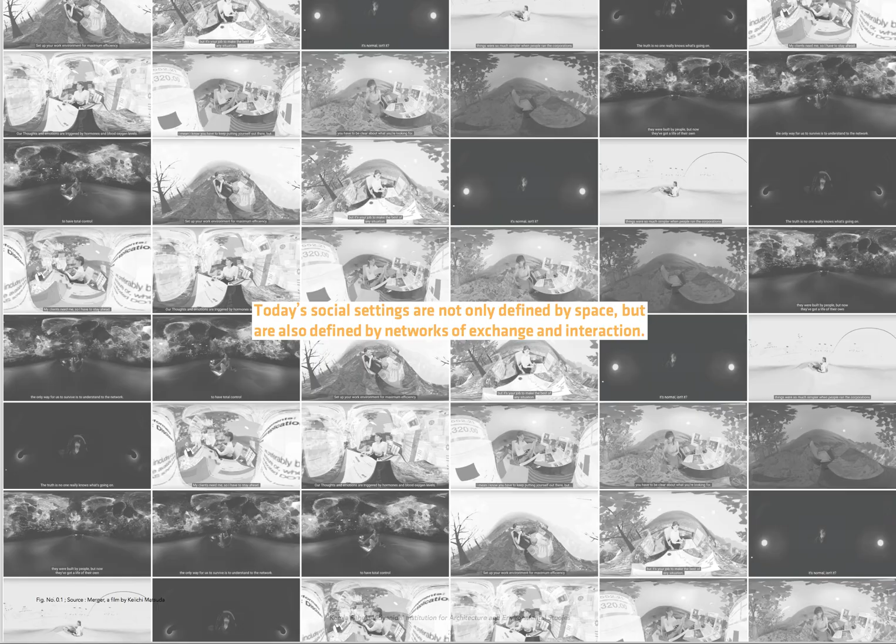Today's social settings are not only defined by space but also by networks of exchange and interaction. We are witnessing the rise of a new type of infrastructure in the city, one that is not human centric, but belongs to the machines.

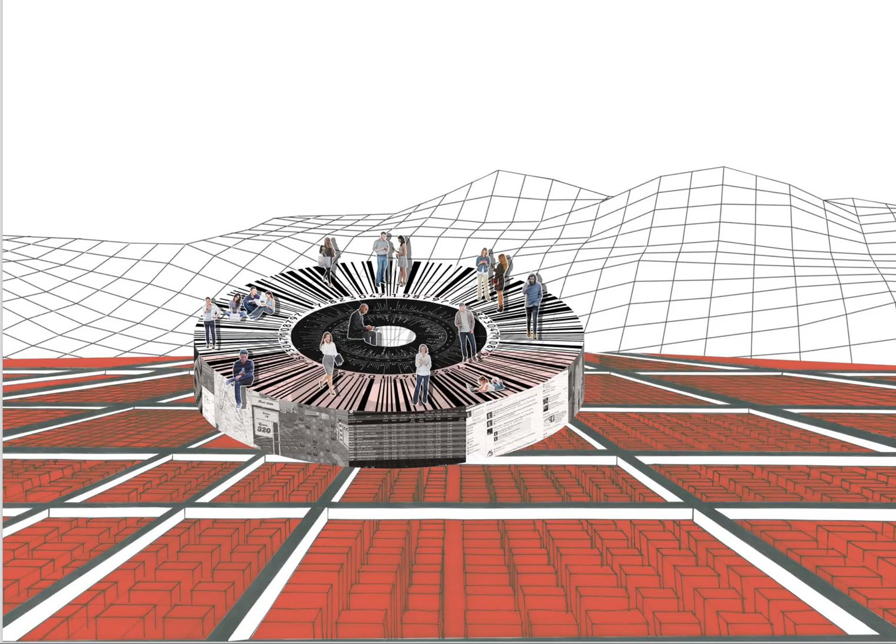The public domain 2.0. The public domain online neither has a fixed identity nor is limited to physical proximity. The digital domain has emerged not merely as a means of transmitting information, but as a major new theatre for public activities at levels ranging from local to global. Communities are migrating from physical spaces to spaces of digital networking, and since the arrival of social media, the relevance of physical public space is questioned.

Machine landscapes. Digital technology has been neutralizing place and materiality. However, big data management itself also requires a physical infrastructure and an architecture. Every digital platform requires a physical establishment to exist. It is an atlas of sites, architecture, and infrastructures that are not built for us, but whose form, materiality, and purpose is configured to anticipate the patterns of machine vision and habitation rather than our own.

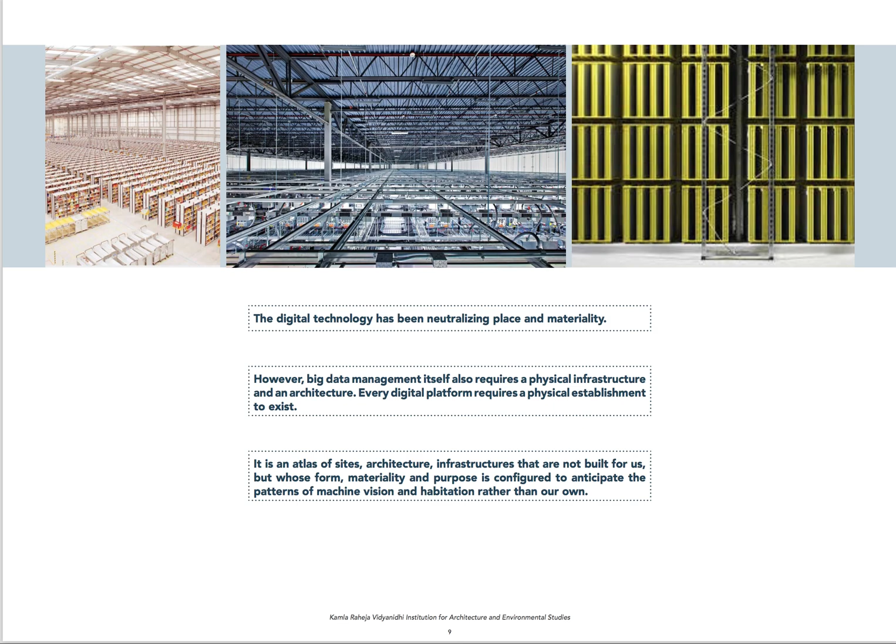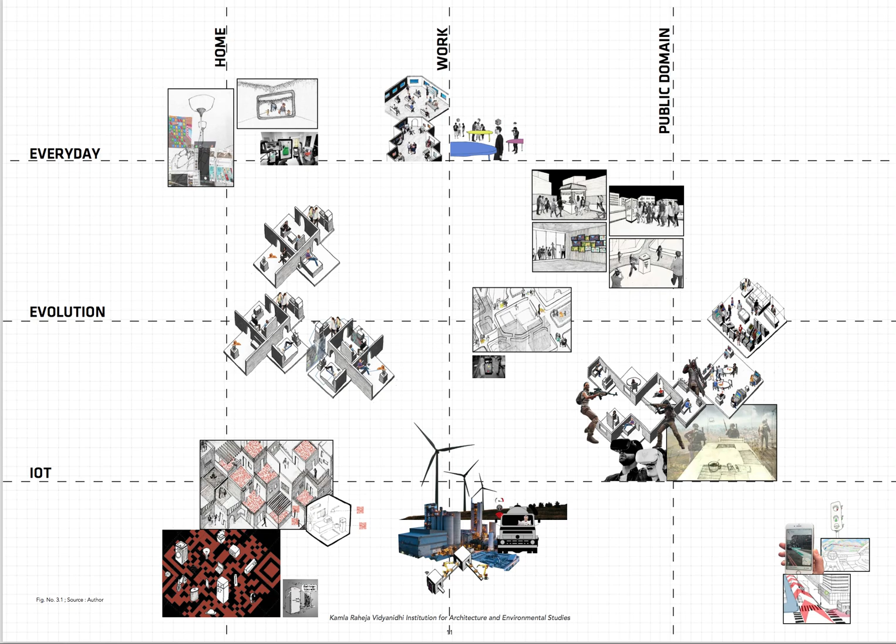Digital space and physical space. Architecture, technology, and the market continuously evolve and shape the way in which we live, sometimes challenging traditional ways of life. In the domestic realm, the arrival of electronic space is changing the social settings of a household. Similarly, employees working together remotely from around the world is becoming the norm. The space we live in expands and is inescapably fragmented, while a new infrastructure connects the pieces.

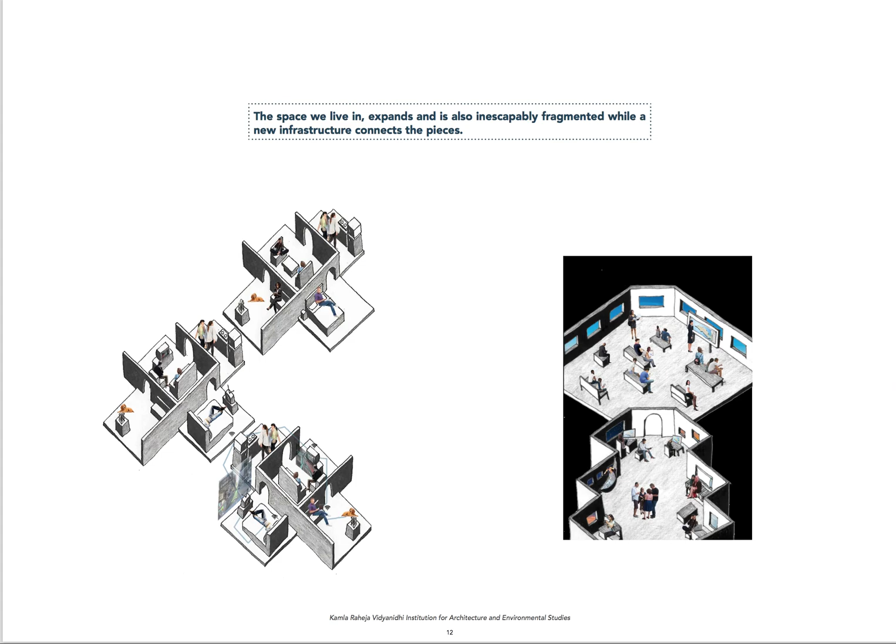Klaus Schwab defines the phenomenon of digital revolution as a fusion of technologies that blurs the lines between the physical, digital, and biological spheres.

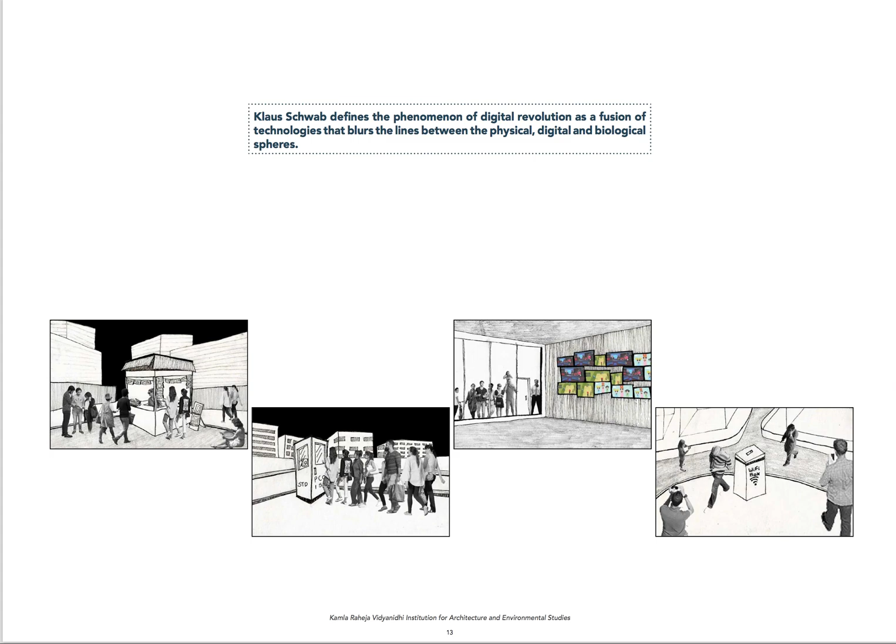Digital urbanism is a phenomenon external to architecture which is harnessed as a means of transforming it. In the era of the post-Anthropocene, the structure of existing human centric programs is changing. Public buildings are changing their roles, yet there is no imagination for a new typology for these buildings. Technology brings forth new products and services while making existing products obsolete and outdated due to the emergence of faster communication.

Digital narratives. The city of Mumbai has been working on a set of existing functions while new functions are also being added to it. The BMC has been concentrating on the segment that deals with citizen oriented online services to trigger off the first phase of its digital implementation. The basic role of providing administration and governance to the city is played by the Brihan Mumbai Municipal Corporation, or the BMC. Its administration is spread over 6 zones and 25 wards in Mumbai.

Mumbai's free information kiosks give access to email, e-banking, e-greetings, forecasts, exam results, railway inquiry, Mumbai Guide, movies, restaurants, news, health, education, and more. One can also get information about taxes, bus routes, rail routes, and fares. These kiosks are located at various junctions within the city.

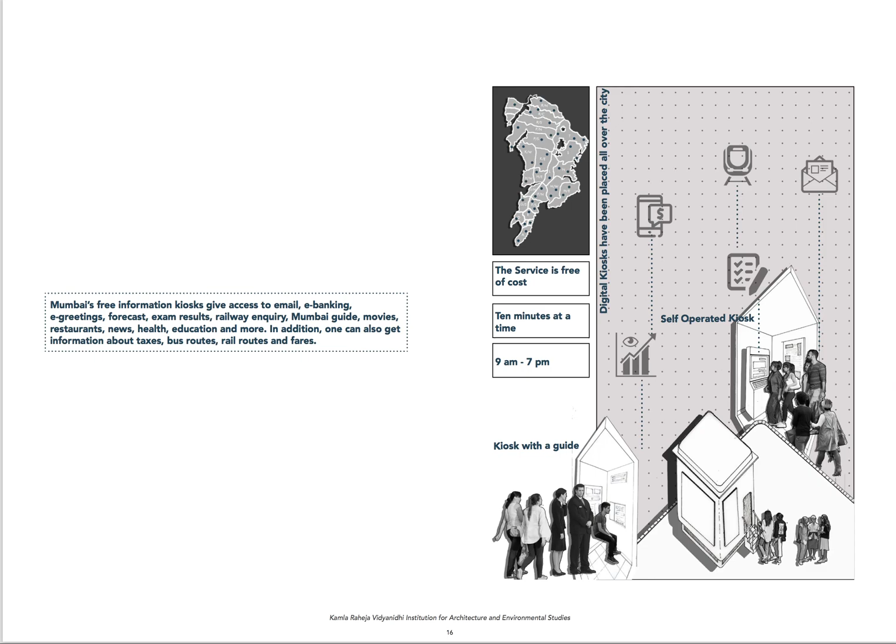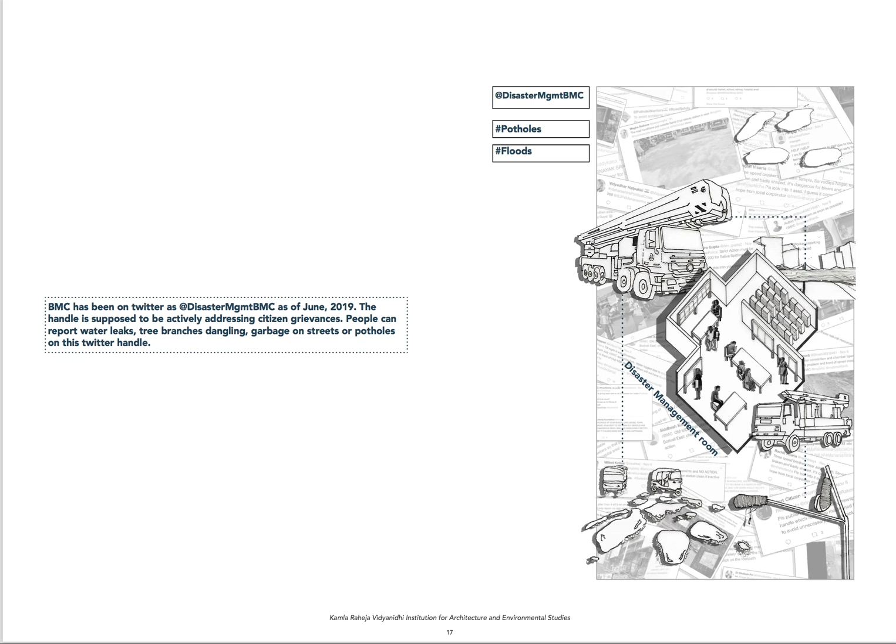The BMC has been on Twitter as @disastermgmtbmc as of June 2019. The handle is supposed to be actively addressing citizen grievances. People can report water leaks, tree branches dangling, garbage on streets, or potholes on this Twitter handle.

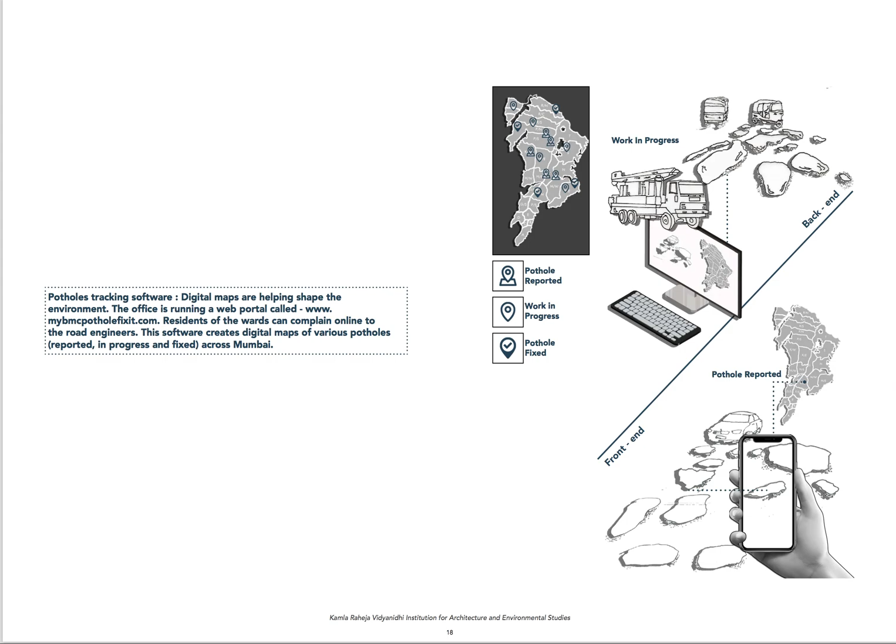The potholes tracking software. Digital maps are helping shape the environment. The office is running a web portal called mybmcpotholefixit.com. Residents of the wards can complain online to the road engineers. This software creates digital maps of various potholes reported, in progress, and fixed across Mumbai.

The meaning of citizenry. Urban residents are considered as data subjects. Our participation in cities is both the product of data and the producer of data. The digital revolution finally will not only change what we do but also who we are. It will affect our sense of privacy, our notions of ownership, our consumption patterns, the time we devote to work and leisure, and how we cultivate our skills and nurture relationships. The list is endless.

A new typology. Buildings have predominantly been designed to house a specific movement of the human body. However, with human activity no longer being the center of the programs, the built environment will change in terms of what they are. With every possible function available at the convenience of our screens, what will be the relevance of these existing government buildings? The new typology of public buildings must prove capable of embracing a world of constant change, subjecting its structures to the levels of transparency and efficiency that will enable them to endure changes.

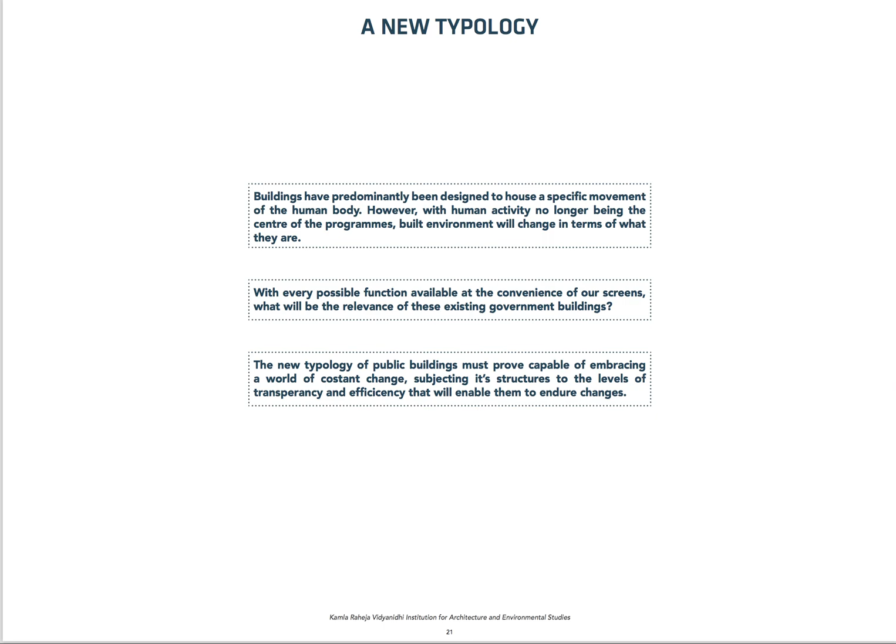The Medialab Prado is an art center in Madrid, a flexible structure behind the concrete walls of an old industrial building. The building functions as a research laboratory and exhibition space for Medialab Prado, a city-funded organization exploring the production and dissemination of art and digital culture.

La Cosa, or the Thing, is the name architects have used to refer to the group of mechanisms, installations, and facilities that, when assembled, made it possible to bring the building up to date with current requirements.

These forms of coexistence created the scope for some of the strategies used in this adaptation: the appropriation of the existing building as a container for latent energies that joined the project as an effective material, and the non-specific treatment of the spaces. This condition resulted in a homogeneous approach to material solutions and the uniform distribution of installations.

Thinking about the action as a stratification with different levels of change over time, lightweight construction systems that can be disassembled were chosen, as were materials whose durability and adaptability will not condition future transformations. Each new intervention was seen as an opportunity to incorporate support systems for creative actions and research.

This included solutions such as the use of double blinds as projection screens, taking advantage of voids in the existing structure to create a retroprojected floor, the use of the dividing wall as a digital facade, and the design of La Cosa as a mechanism for digital experimentation.

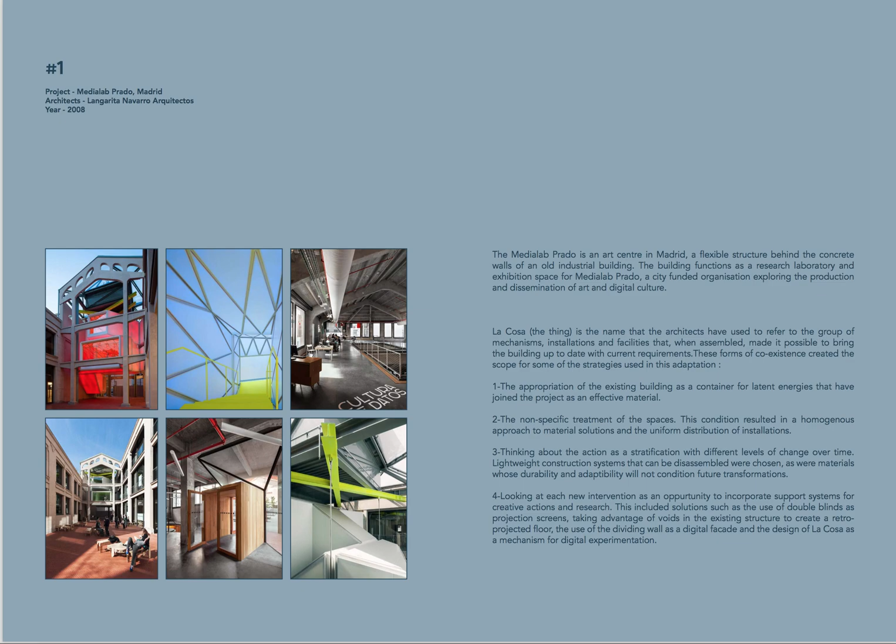The Media TIC building in Barcelona is an information and communication technology hub. This building is designed with a net-like steel structure, avoiding columns on the ground floor and thus introducing a large open public space to the building.

As Media TIC is a commercial building, its physical adaptations can be observed by a large number of people both inside and from the street. The architect made technology a central part of its design, which has been described as performative architecture, where the structure itself performs other functions.

This 8-story building is separated into three zones of varying density. It is creating a new model that will promote collaboration and synergies between the university, technology, and business, with the aim of encouraging the development of an innovative culture.

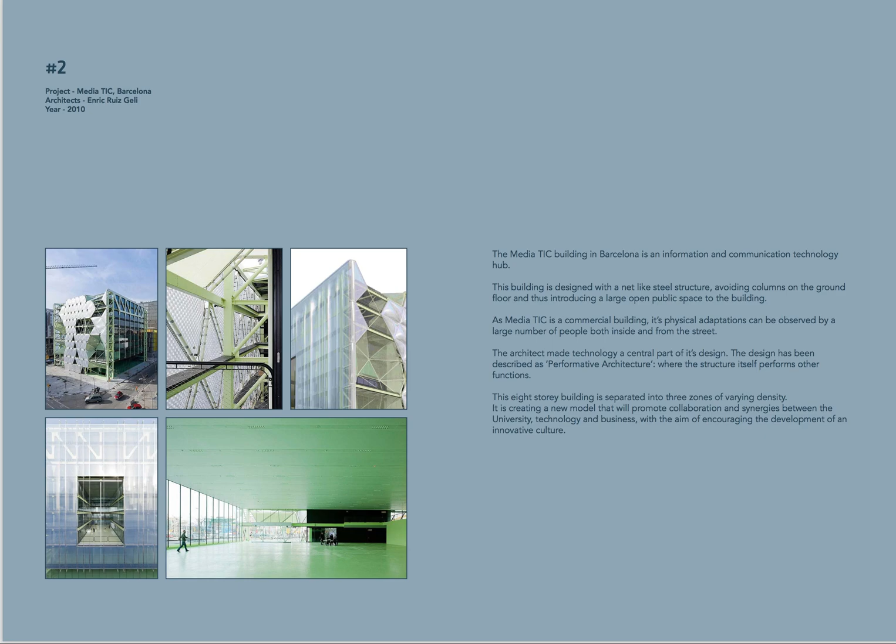This project is the transformation of the existing Banyan Garage, a car-devoted building from the 70s. The Banyan Hub offers in a single building a wide range of different programs. It is conceived to be a unique landmark, not only for its flexible and hybrid design but also for representing

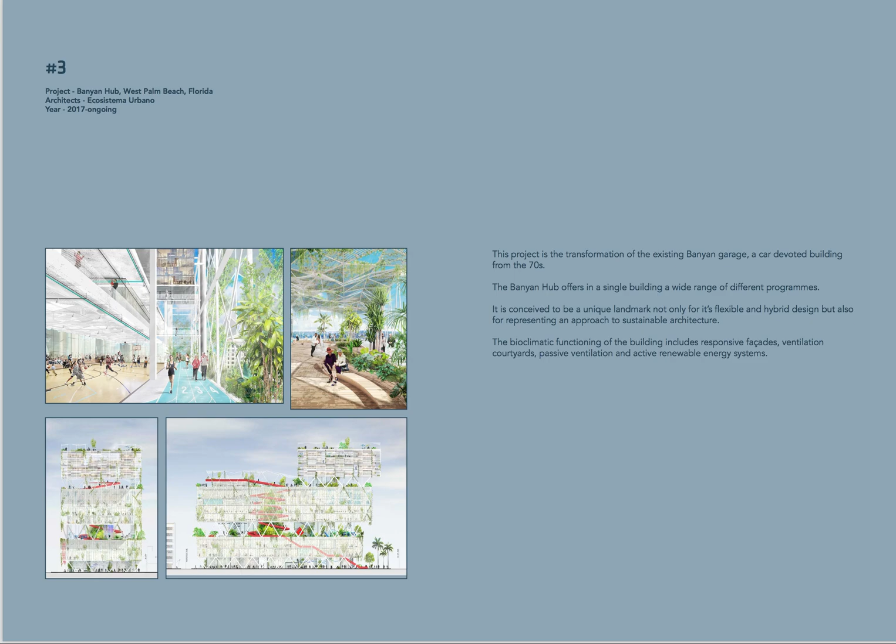an approach to sustainable architecture. The bioclimatic functioning of the building includes responsive facades, ventilation courtyards, passive ventilation, and active renewable energy systems.

The public building. The thesis aims at imagining a new architectural typology for the Mumbai ward offices.

While other building typologies may cease to exist as a result of the digital revolution, government institutions must continue to evolve its physical form. Their design should adopt architectural systems that are actual catalysts for every kind of activity or function, independent of the form that they may take.

The goal of this project is to develop a series of conceptual strategies aimed at establishing conditions for new urban events. This new architecture should be based on intersection and superimposition of technology and community rather than segregation.

The architecture of these buildings will no longer serve isolated functions; they will be designed to extend and redefine their roles. The juxtaposition of digital technology, scale, and the public in contemporary culture belongs to the logic of a new urban society.

The concept of this urban generator will not only allow for spatial links with the existing city but will also encourage unpredictable programmatic developments that will inevitably appear in the coming decades.

In order to create an architecture for a governing system that is more flexible and accommodating, and to reimagine the nature of public interaction and participation, it becomes important to root the analysis into the everyday.

We begin by decomposing the overall program into its main constituent elements and aligning it with the new digital services. Following are the different departments within the ward administration.

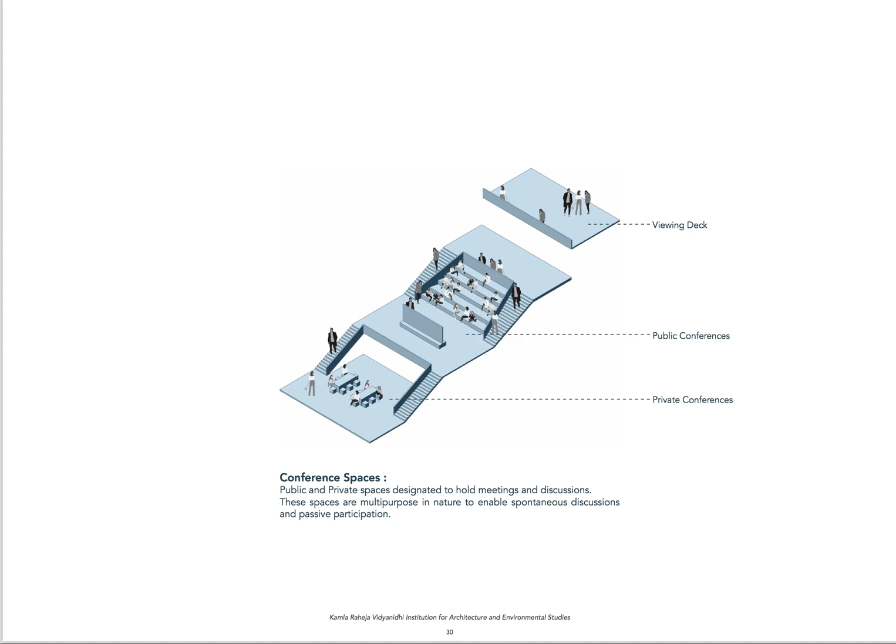Program and strategies: conference spaces. Public and private spaces designated to hold meetings and discussions. These spaces are multi-purpose in nature to enable spontaneous discussions and passive participation.

Data lab and workshops: a space where anyone could engage in workshops for understanding data and e-education. It is an experimental space to produce and disseminate information. These programs are important for groups who are either deprived of technological access or senior citizens who find it difficult to cope with the digital manifestation of services. It also offers free hardware and software tools for mapping, modeling, and graphical experimentation.

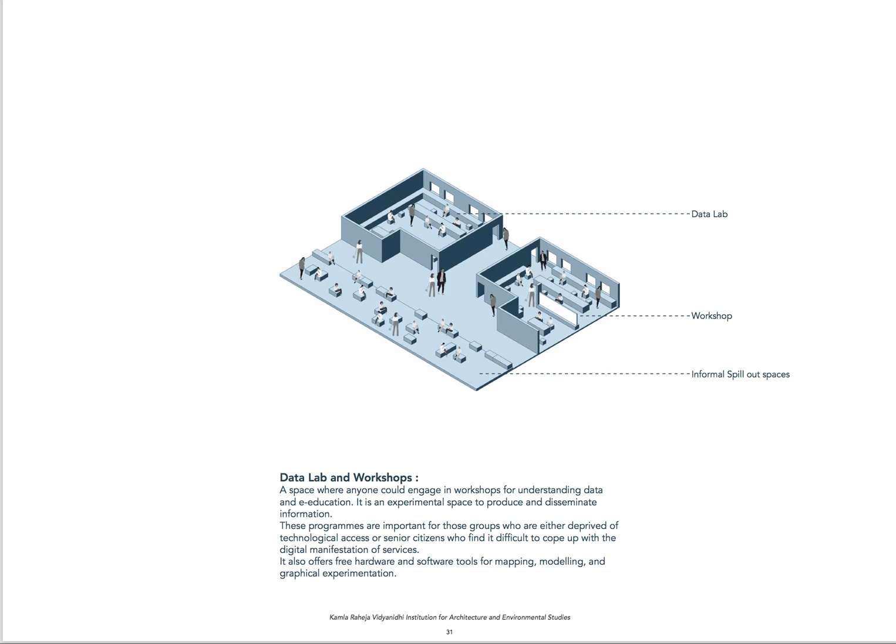Video viewing rooms. A large number of city data is being collected every day. This data should be transparent. It includes traffic updates, weather reports, potholes, tracking, and more.

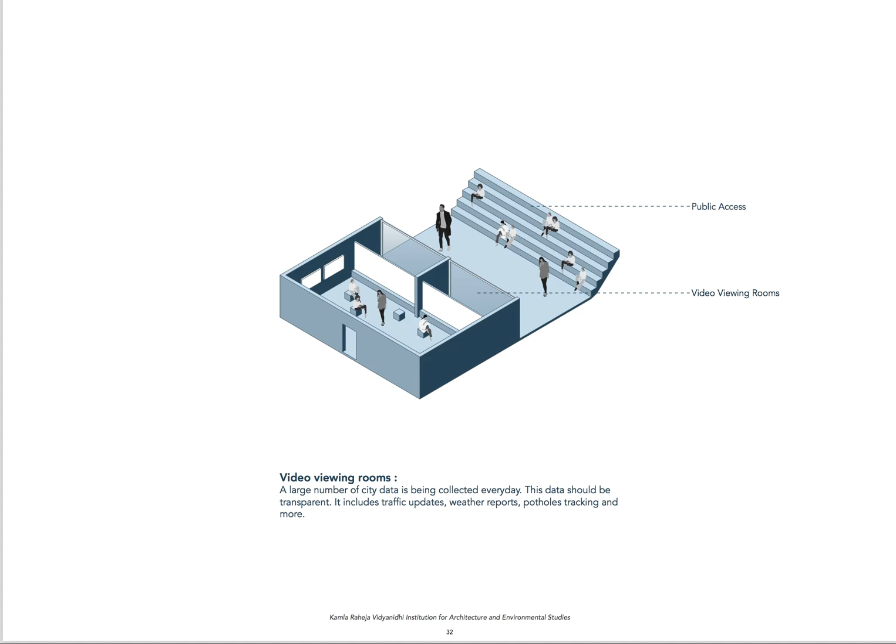Participatory planning. Digital technology makes it easier to include public participation in the planning of a city. This public participation should reflect in the design of planning offices. The physical offices should not be isolated from public activities.

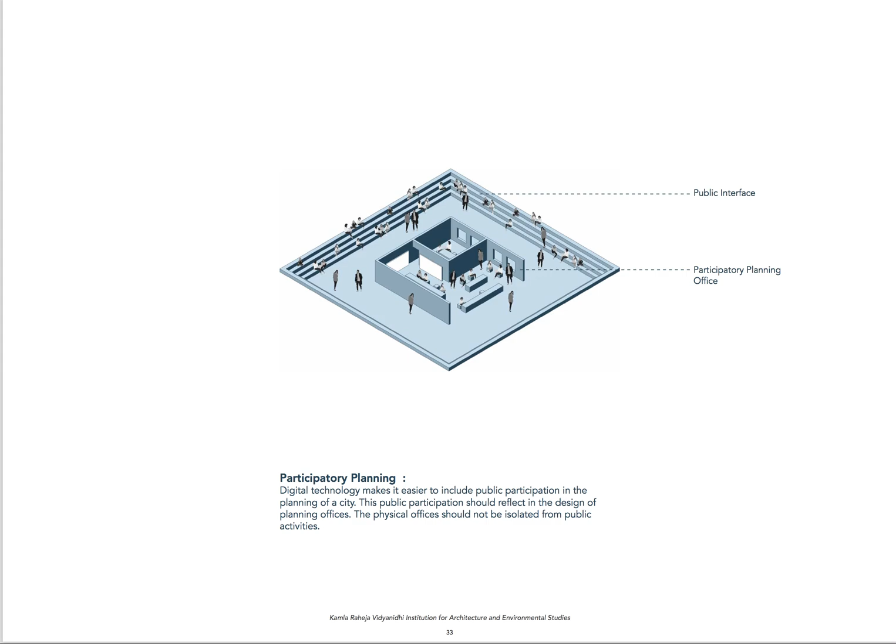Flexible spaces. Department offices are slowly going online. However, we often see a sudden rise of human activities in certain departments. For example, the public health department in the Mumbai ward offices experienced high human traffic due to the COVID-19 pandemic. Likewise, the sewage and maintenance department experiences the same every monsoon.

Flexible public interfaces accommodate the rise and fall of population within the ward building. They also become possible spaces to hold public events in the future.

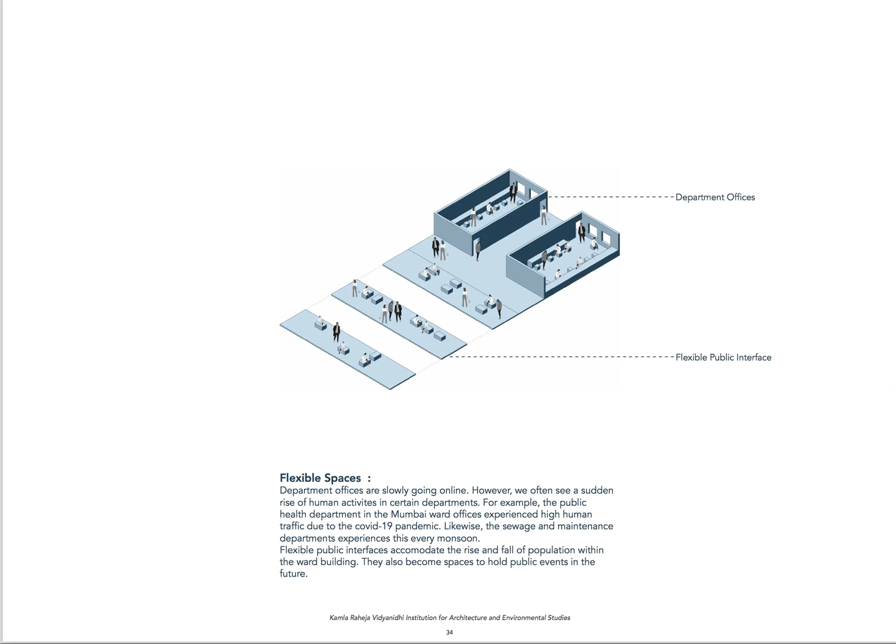The prototype. The thesis aims at designing a system that can be a vessel for the ever changing trends in societies. A prototype with key elements is designed to meet these requirements.

The street. To enable people to unintentionally engage with the building, a thoroughfare street is designed as an important part of the ground plane. The street brings with it the hustle and chaos of the city. It gives opportunity for everyday public activities to grow and expand as a part of the building.

A service core will maintain the primary circulation in the building and provide the building with all its bare minimum requirements.

The archival. In government systems, all digital data is preserved in its original physical form as well. This data ranges from large-scale city plans to birth or death certificates. At present, the ward offices are becoming inefficient warehouses for this storage of data. An archival zone, along with department offices, is designed to accommodate this data and to possibly increase its scale in the future.

Public platforms. These are the transient elements of the building that enable it to constantly evolve. These platforms do not have rigid functions, they act as an important public interface to the building.

Structure. A structural system with steel columns and long span beams is used to provide the building with its flexible architecture. Shell. The building is enclosed by a veil-like system to blur the lines between the indoor and outdoor spaces. This opens up the building into an urban park and eliminates the feeling of isolation.

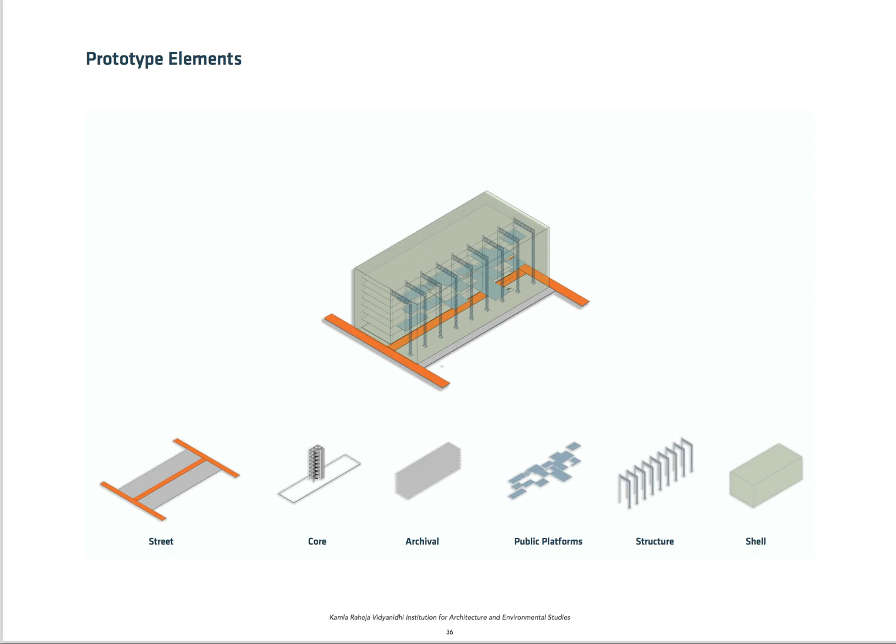The prototype as a building. The elements of this prototype get transformed into different buildings based on different site conditions. The six elements form different structures in 5 different wards.

The B ward. An axis created across the building connects two streets and is further divided into two archival zones. The cores are connected to one another through the public platforms.

In the C ward, a zigzag street connects the main road to the back alley. The building is set at the back end of the plot, leaving the front end open for public activities to merge and grow within the site.

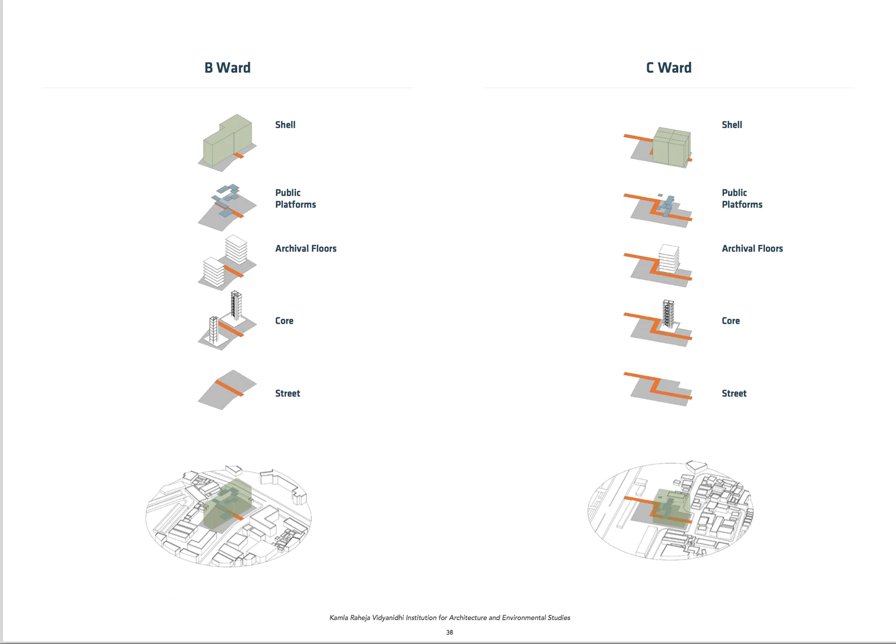The F North ward. This building is placed perpendicular to the two streets that it connects, leaving the rest of the plot for further expansion of public activities.

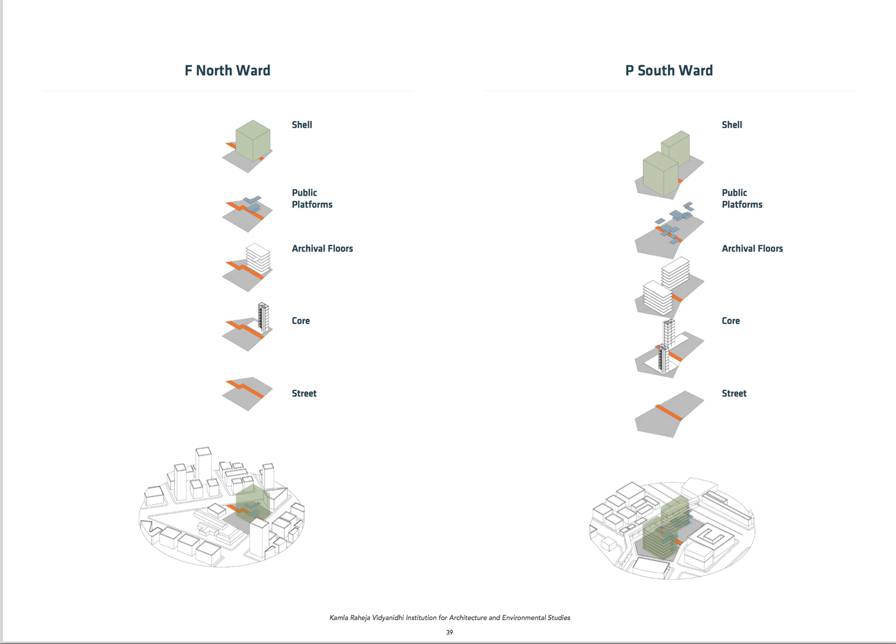The P South ward. This building is in an L formation, hence the public platforms are facing inwards while the archival zones are facing towards the street to prevent isolation.

The D ward. The D ward office in Mumbai is located near the Grant Road railway station. It covers a total area of 1.7 kilometers square. The site is set along 5 intersecting roads.

The building is designed along an existing thoroughfare street. The archival zone is designed as a long strip at the back of the plot, and the front end of the building is open for public functions. The elevation of the building is further staggered to enhance the quality of natural light that enters the building.

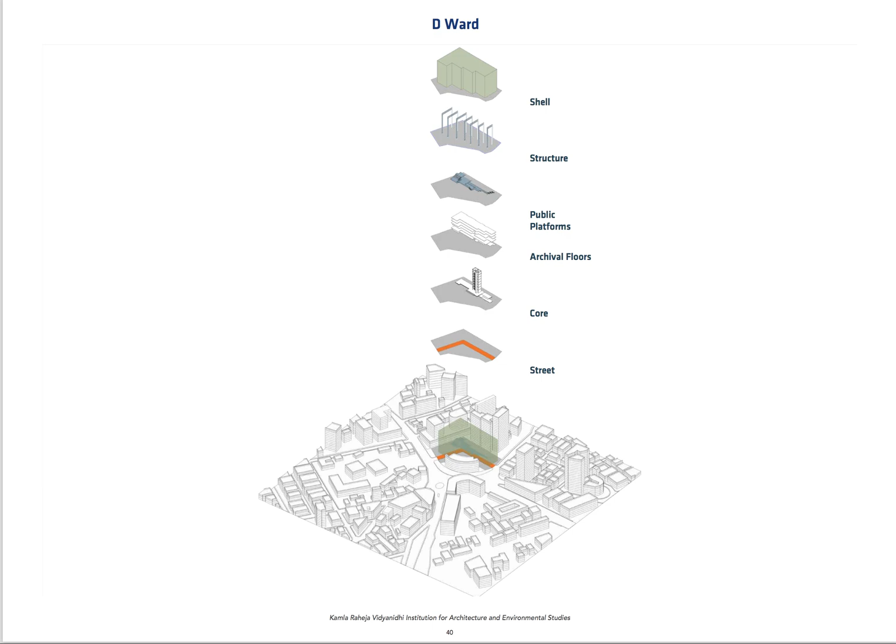The D ward building is further designed in detail. Along with the pedestrian street, the ground level has vehicular entrances and exits to allow basement parking. This level mainly has public functions like the cafeteria, parks, informal waiting areas, and so on.

The ground level acts as the first public interface of the building. It is also an open green space for the city, hence the ground plane is opened up for larger public activities.

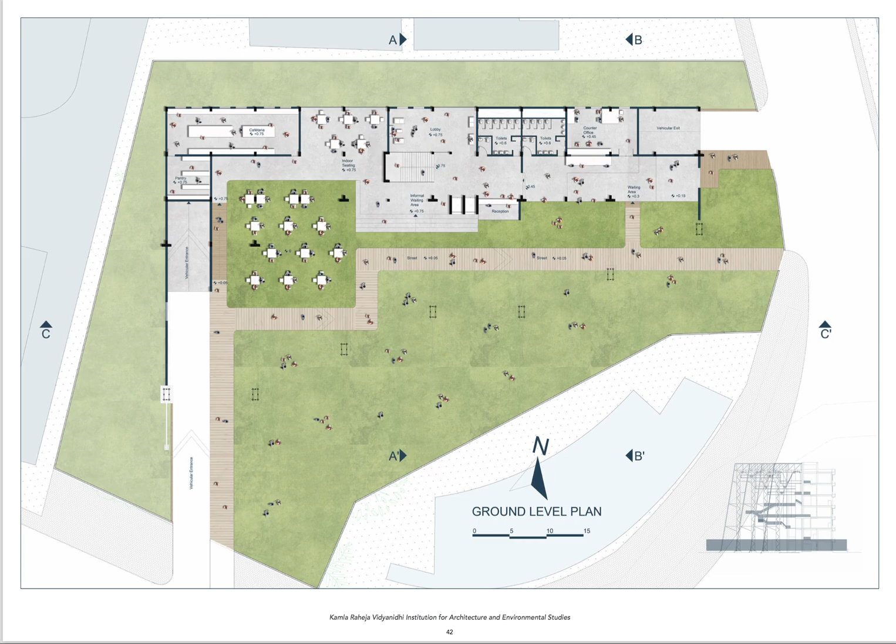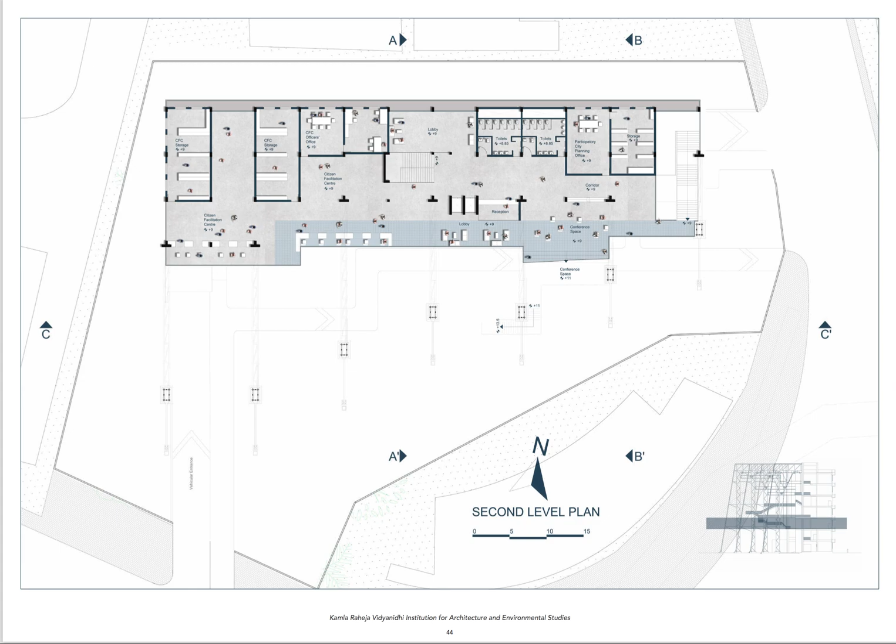While the storage and department offices are enclosed by walls, the public interaction happens in indoor public platforms. These large columnless platforms are suspended from long span beams using steel cables. These platforms are important secondary extensions to the building. They do not have rigid programs and can be used as per the varying needs of the building.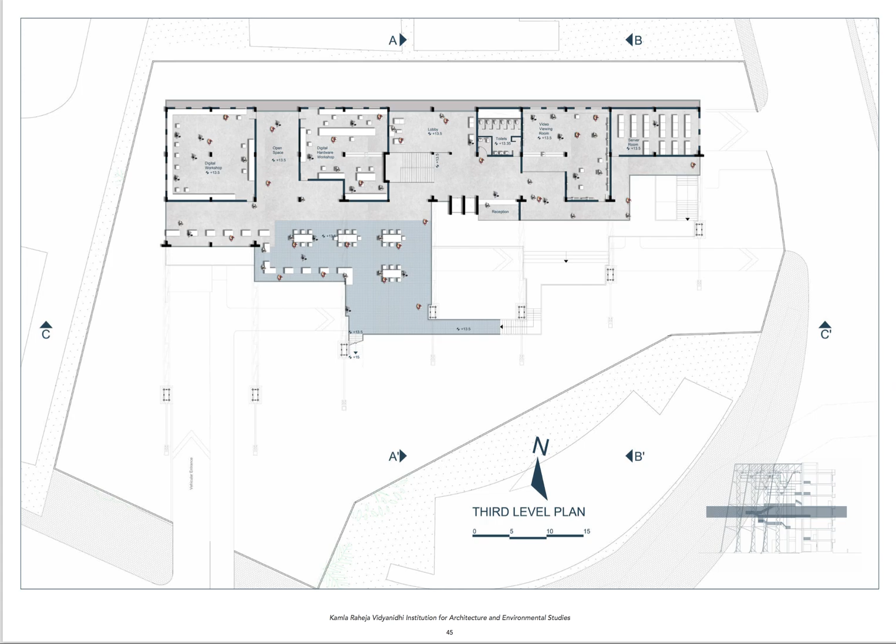An informal circulation is designed along the front elevation. This alternative circulation connects the public platforms. It also becomes a part of the building facade.

The back side, or the north facade of the building, has large openings. These openings allow pleasant natural light to flood the building. The openings are strategically planned to accommodate a rise in demand for space.

Open conference spaces are created within the platforms. These spaces are separated due to difference in levels. However, the public conferences are visually accessible throughout the building.

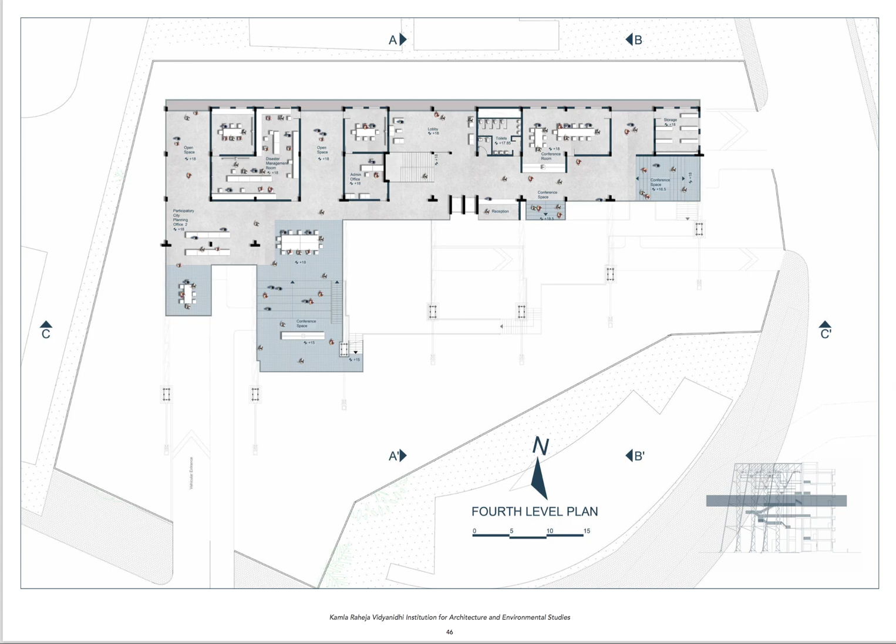The fifth and the sixth floors have department offices. The public platforms on the last two floors are designed to be transient in nature. The levels of these platforms can be altered as per the different events of the city.

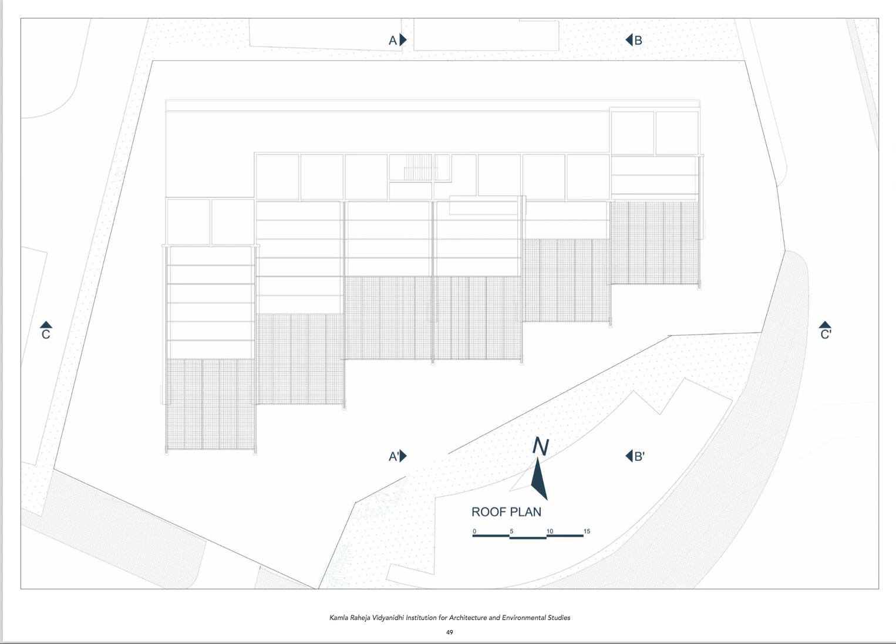The south facade of the building is made of an inclined mesh. This is a green mesh that allows vegetation to grow over the entire facade. Due to the thick vegetation that grows on this facade, the light that enters the building is diffused.

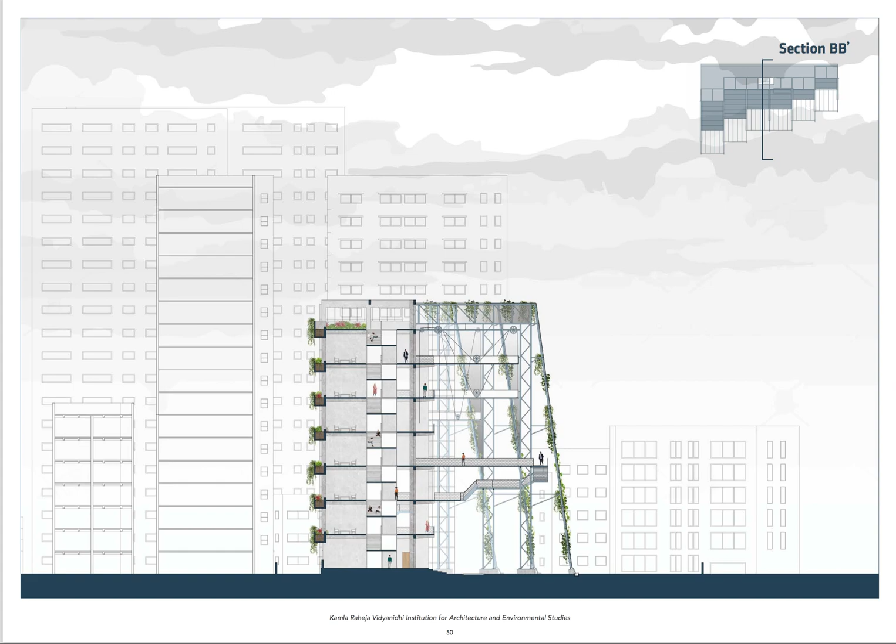It also visually opens up the building to the city. The green facade creates an almost outdoor-like experience within the building. It helps in extending the urban park vertically throughout the building.

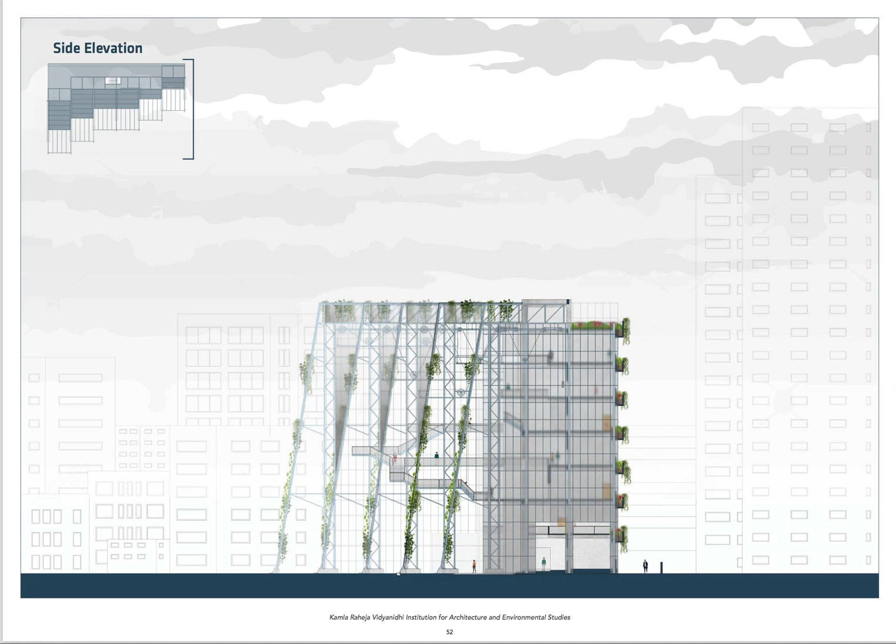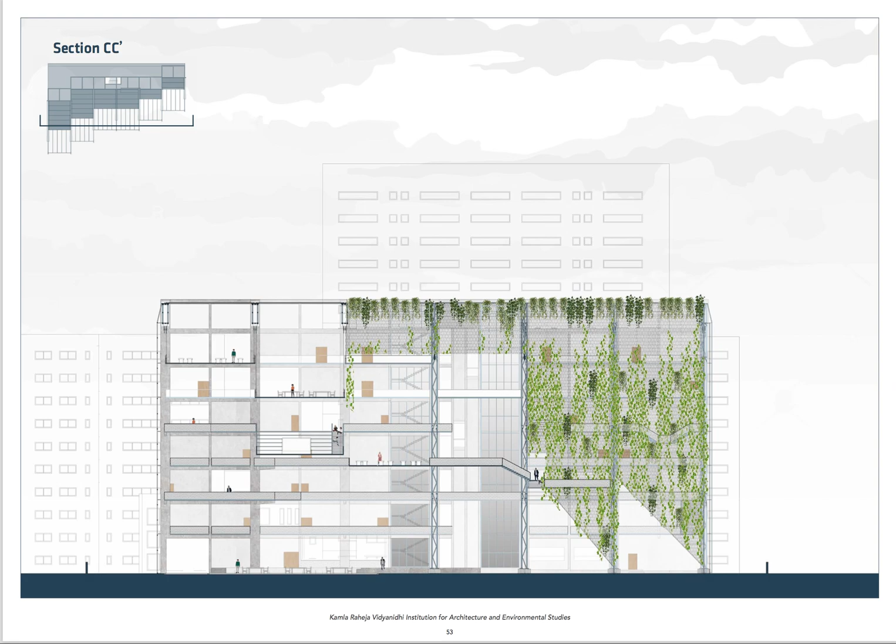The section CC dash cuts through the green facade, therefore we see it partly in elevation and partly in section. The section demonstrates how the public platforms in the buildings engage with one another, thus seamlessly connecting various events. The building becomes an active urban park along with its inherent programs.

The first view is taken at the conference space. It is an amphitheater like space and is designed to encourage participation and inclusivity. The second view is taken along the corridor where you see the harmony of the variety of activities happening at different levels. The third view shows the active public life on the ground plane.

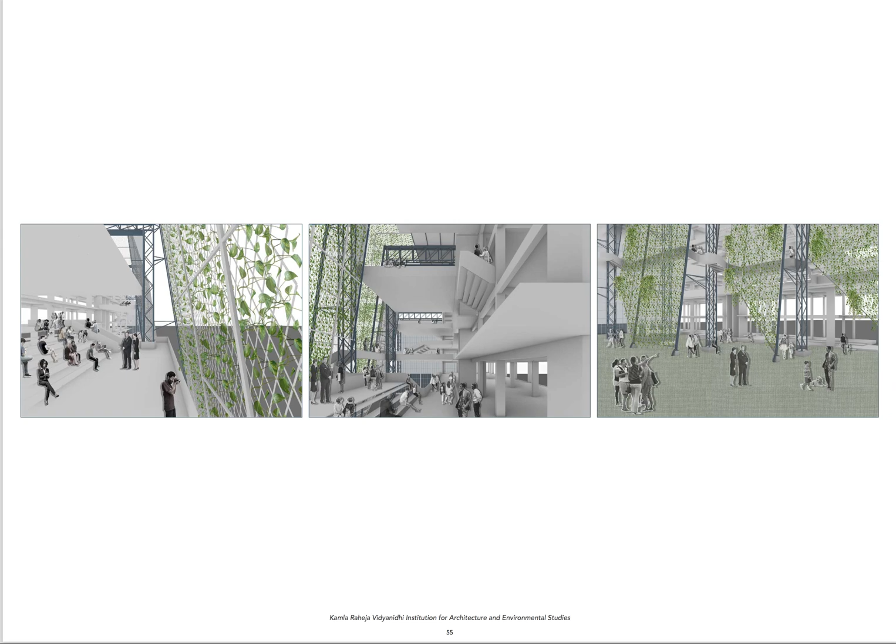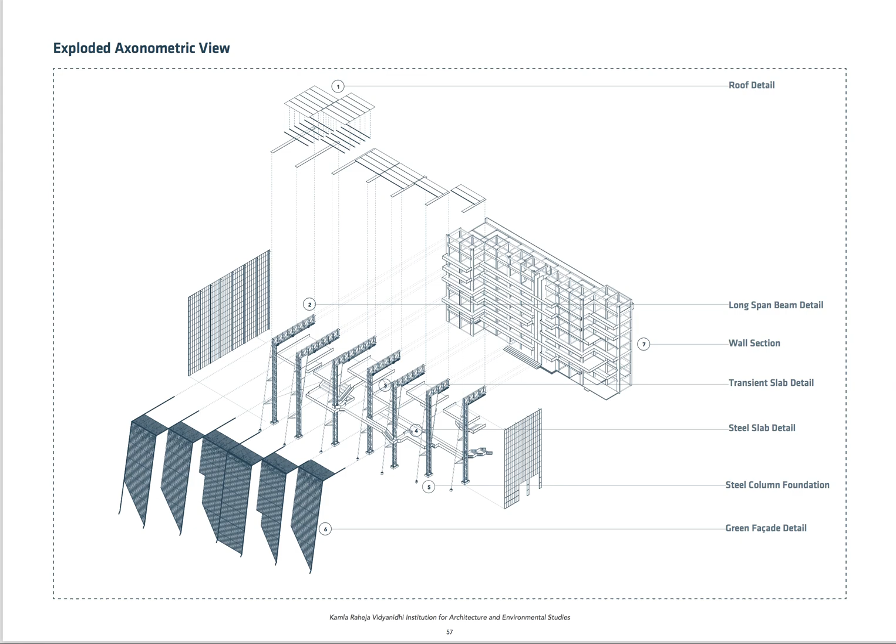The structural system is a combination of RCC and steel construction. The exploded axonometric drawing explains how the entire building is structured. It focuses on details like the roof detail, long span beam detail, wall section, transient slab detail, steel column foundation, and the green facade detail.

Roof detail. The inclined aluminium mesh of the green facade continues to be a part of the roof. The rest of the roofing is done using tongue and groove particle board decking.

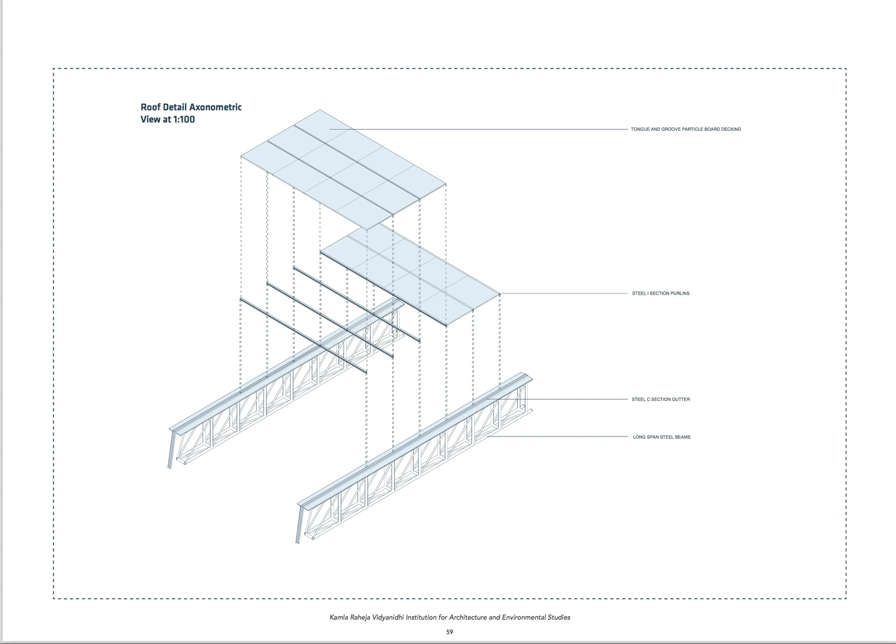Long span beam. The long span beams are connected to the RCC columns using anchor rods.

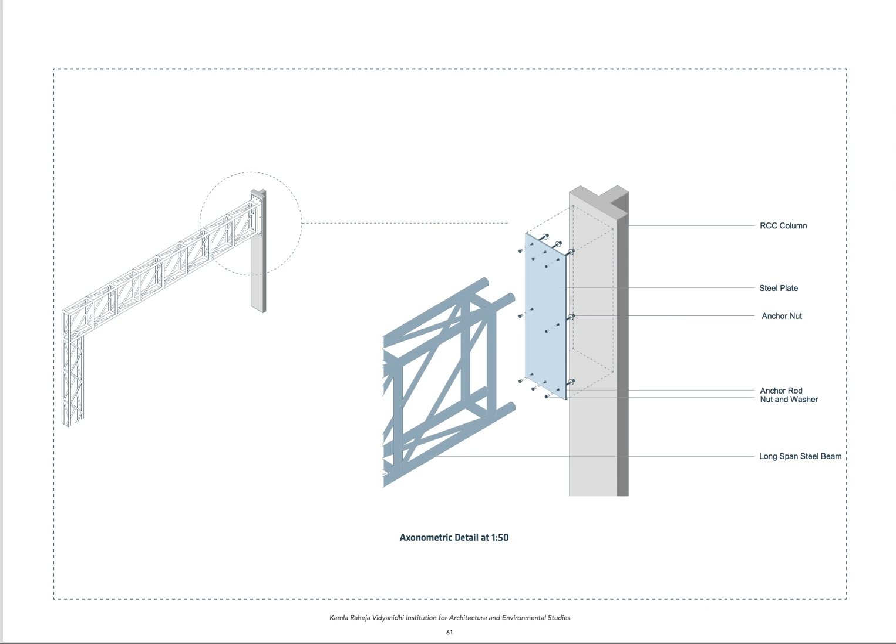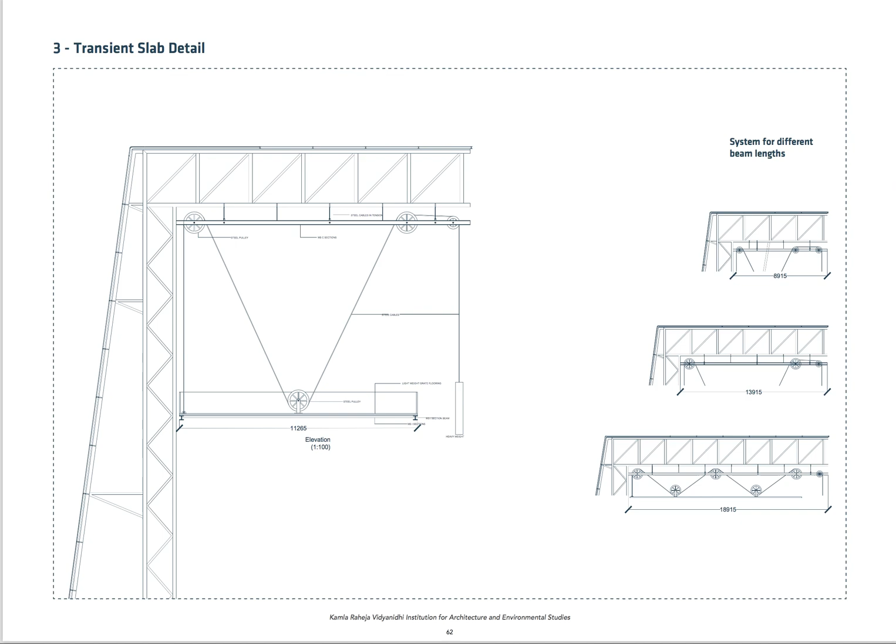Transient slab detail. A pulley is a wheel on an axle or a shaft that is designed to support vertical movement. It has a grooved rim along which a steel cord passes. It changes the direction of the force that is applied to the cord. This system is mostly used to lift heavy objects.

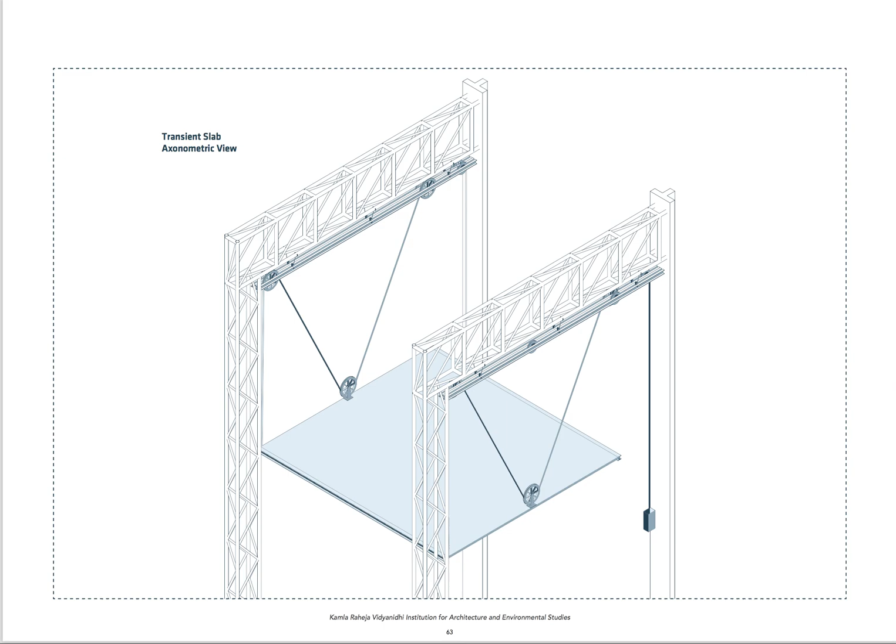This system here is used for the transient slabs to provide the flexibility of vertical movement. By using a combination of multiple pulleys, the load is reduced and the movement becomes effortless. These pulleys are placed between two C-section beams which are suspended from the larger steel structure.

Steel slab detail. Steel column and foundation detail.

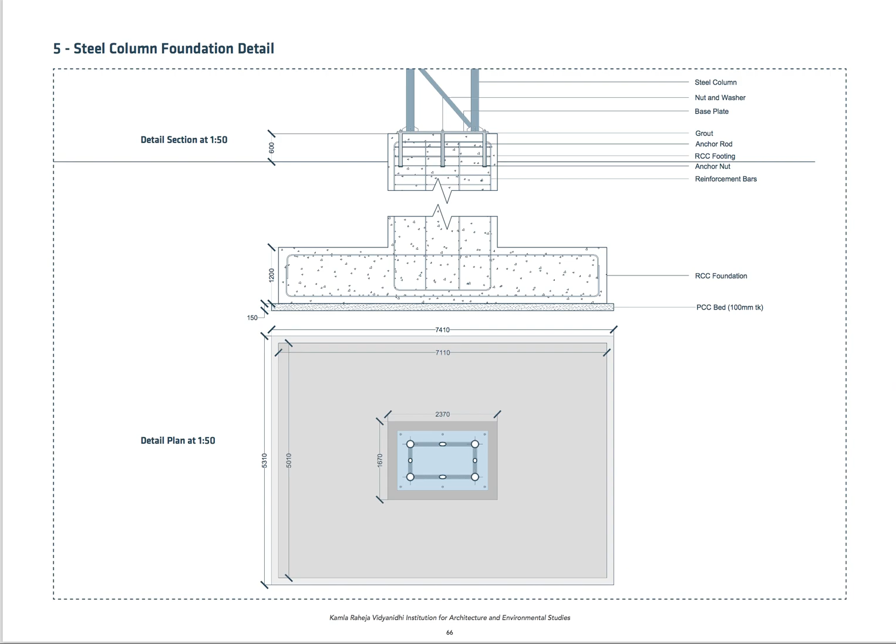Green facade detail. The entire green facade is supported by an inclined steel framework that also acts as a buttress to the rest of the building. This facade is lined with steel C-section gutters that act as downtake channels for rainwater.

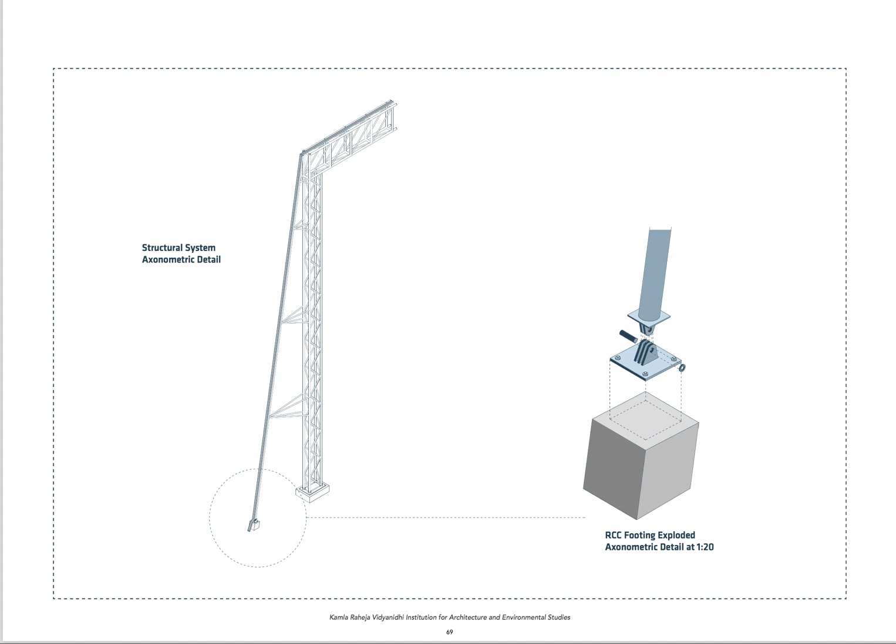My aim in this thesis is to establish the concept of the urban generator throughout the ward building. The architecture of this building allows new spatial links to form within the city. The flexible nature of the building can meet the unpredictable patterns of future societies. The three key words that focus on the design of the building are public, transient, and an urban catalyst.